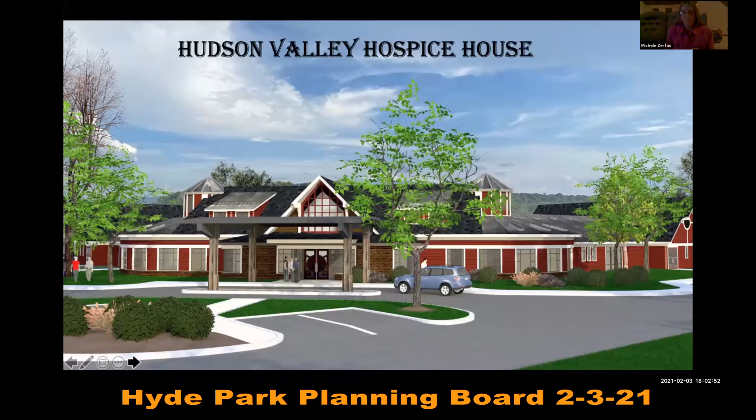Since you last seen the Hudson Valley Hospice House, the overall site plan, which would be slide 2. I don't know if Neil's going to run the. Okay, slide 1 is Hospice House, the front. That's what it looks like, and then the second slide will be the site plan, and the site plan is basically the same, except that we've moved the oxygen.

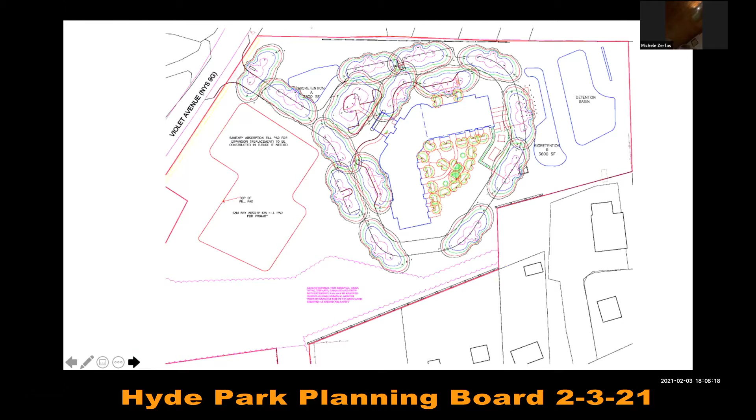And then the area of trees to the south, that area is sparsely treed. If those of you who went on the site walk remember, there are trees out there, but they're spread out with lots of rose cane underneath. So this area is not really going to be put into preservation because it's going to need maintenance. Those rose canes are invasive species.

For the building, there's trees proposed along the road. The one section by the bioretention where no trees are proposed is because the bioretention will be 5 foot high and it's going to provide its own screening.

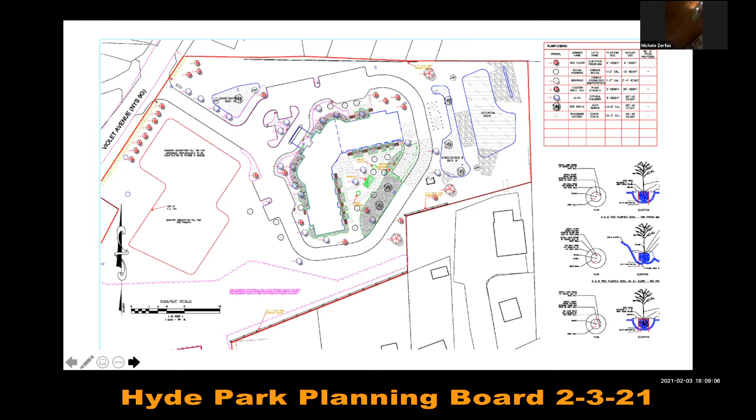So that covers the majority of the items. I would be very interested in hearing the planning board's comments and opinions on this project. So Chairman Dupree, I'll send it back to you. Thank you.

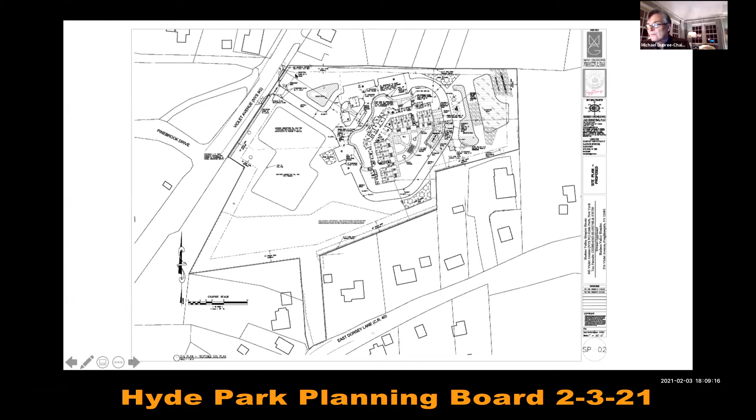Board members, do you want to go first for once instead of having the consultant speak? I don't see Mr. Sotero here. There he is. You see him? I'm here. Well, I hear you. For some reason, you're not showing. Oh, there you are, Peter. Sorry. Yes, I'm telling you, I'm losing this.

So board members, do you want to go first? Let's break with tradition tonight. How about starting with Diane? Ms. DiNapoli. Okay. Good evening, everyone.

I did hear Michelle talking about not having a need for benches, and any landscape at the opening at 9G. There is landscape, we're proposing trees up there. We just didn't know if there'd be a purpose to have benches up there.

I do think benches are important, not only because unless you're only going to hire staff that guarantee driving with cars, you have employees that will be taking buses or public transportation. That would be a courtesy for them to have it. I could also see, if not the residents themselves, family members there who have been there with their loved ones, wanting to go for a walk, and before they turn around and walk back down, wanting to sit, especially if it's nicely landscaped. So I do think a bench or two would be important in the area.

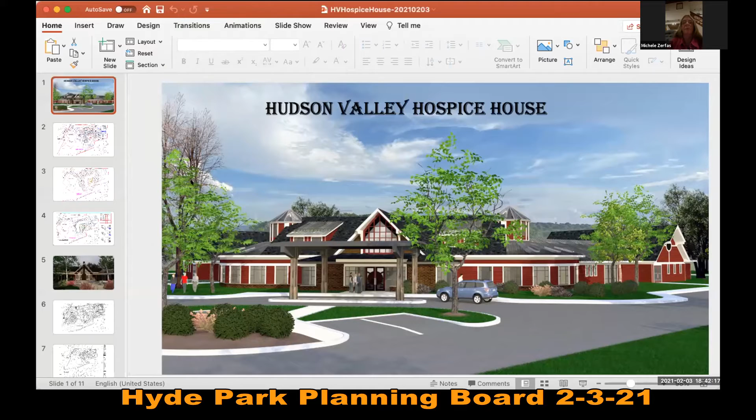Neil, it's the second slide. The dumpsters are in the back, in a shaded area near where the oxygen tank is, just north of the car repair place, kind of the northwest corner of it. There's a little bump out, a small rectangle coming down off the driveway next to the bioretention.

That's where the dumpster is located. I think it'd be helpful if you could use a pointer on the plan just to make sure everyone's clear. Whoever's screen it is, there it is, Neil's got it. Perfect, great circle. Thank you, Neil.

And then the septic system and the well that we're talking about - the well is in the courtyard in the middle, right next to the building, at the back of the building in the courtyard. Yes, right there, that's the well.

And the septic system on the left side, you'll see two rectangles together. The big open area is where the absorption fields will be, up against 9G. Okay, over there, thank you.

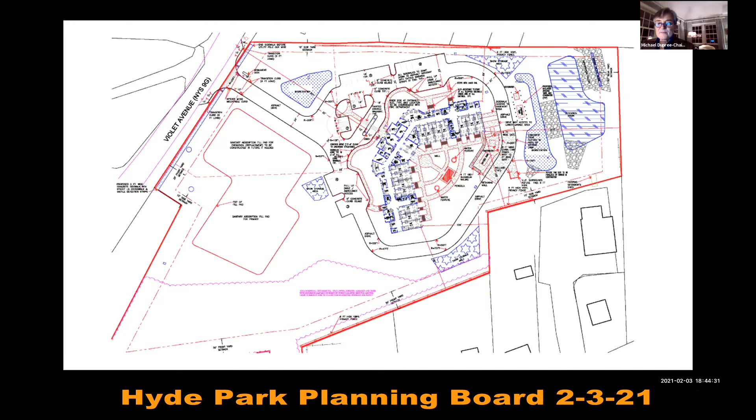Hi, I just want to thank the board for such a wonderful job of taking everything into consideration, all of our concerns. The only thing I have to say is a dark fence with some cedar trees would be lovely.

Thank you, I agree with you. At our agenda meeting, I Googled while we were on Zoom and looked at all the colors for vinyl fences. I just assumed they were white and gray, that's all I've ever seen. They come in every color, including hot pink, of all things. I don't know why you'd want a hot pink fence, I guess maybe Baskin Robbins still has those.

But at any rate, I was going to echo my colleagues that a natural earth tone color such as gray or brown would blend in better than white. And there's no difference in cost whatsoever for the different colors. So thank you.

And Mr. Leonard? Good evening everyone, thank you for taking the time and considering all of us as a neighborhood, we do appreciate that. As far as looking and viewing from the neighborhood, 6 foot wouldn't be high enough because I look into Sue's second story, so 6 feet isn't going to be enough.

You should be able to share. All right, can everybody see? Yeah. So this is the existing site plan, basically as it exists today. This is, on the right, the existing adoption education facility, and then as the chairman described, the existing medical facility is over on the left. I assume everybody's fairly familiar with the site.

The SPCA has a tremendous difficulty having these buildings separated. I think there was an initial site plan which anticipated a phase 2 off on the right-hand side of the existing adoption building. But they received some funding, and they had tremendous financial difficulties, and wanted to do a much more modest proposal to get the medical clinic facility closer to the building. There's some real issues with topography on the other side for a small project.

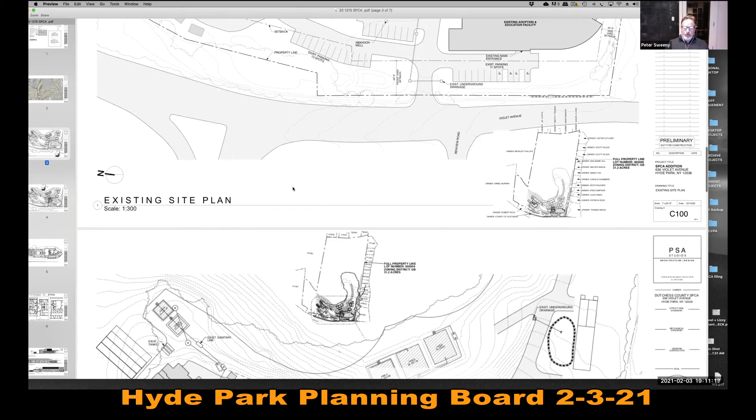So the proposed plan basically looks to take just the clinic part of the existing building, which is actually rather small, basically 1,700 square feet, and add it to the existing building. Since there is no change of use, there's not going to be any additional staff or visitors as a consequence. There's no change to the amount of parking that's required for the project.

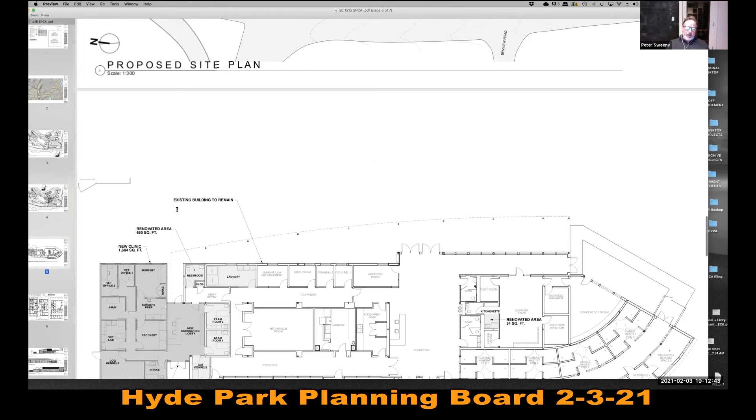Basically, we've left all of the existing parking in place. Just to point that out, this is existing, 19 spots. What we've done is basically just shift the gravel access drive, which goes down to the back of the site, slightly to the left. The building we're proposing houses all of the clinic facilities. There's some minor changes in the existing building which I don't believe we need to review. The big issue for the facility now is they need two different entrances and accesses to two separate buildings, so this allows them to unify that and create one new public access. It's easier to control, and it's certainly easier for drop off for the public right at that point.

And then the proposed addition, we're basically trying to... this is the existing addition right here. You can see the entrance, which is tucked back from the front facade of the building. But the proposed addition, scale and material-wise, ties into the existing project. The intention is basically to propose as minimal intervention as possible.

The one other small change we're proposing is to put a new generator at the rear of the building. It's basically attached to where the existing dumpsters are, and that would be screened by the building from the front. We're proposing screening around the dumpsters, which does not have screening at this point.

And I think those are the highlights. Happy to answer any questions the board may have.

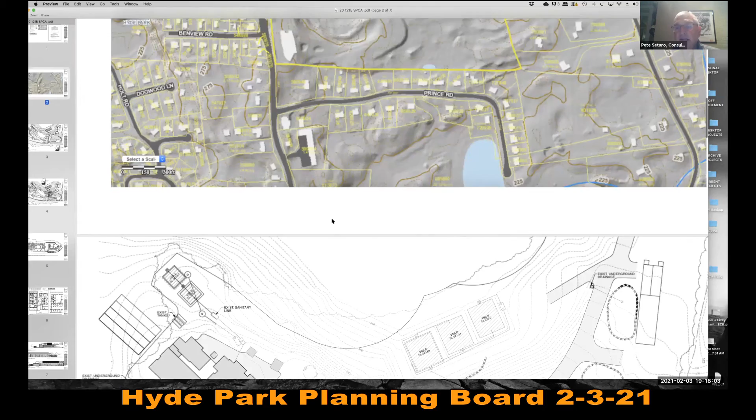Sure. As far as the DOH, if we're going to do a Type 2 action, in my opinion—I mean, we do need to do the 239-M for county planning—but the health department's going to have to issue an approval anyways on the project because the project is proposing a new septic tank to connect to their existing leach field. It's fairly minor, but it does require approval of the health department. So the health department's going to get this anyways. I don't know that we need to make a special referral to them, but they will require an approval, so I think a courtesy referral is in order.

That's fine. Sure, you can do that. Absolutely, yeah, go ahead and get the process started. Bonnie, before I leave you—sure.

In your memo, let's see, I'm trying to find it. Parking calculation necessary, just some small stuff. But we need to show the kennels. There's a kennel run that's not shown here, Mr. Sweeney. I'm not sure that it's still there.

Are you talking about in this area here? Yes. Okay, if it's there, I'll show it. Is it intended that they will be demolished? That's outside of what my conversation has been with them, but I'll clarify that and add it to the site plan.

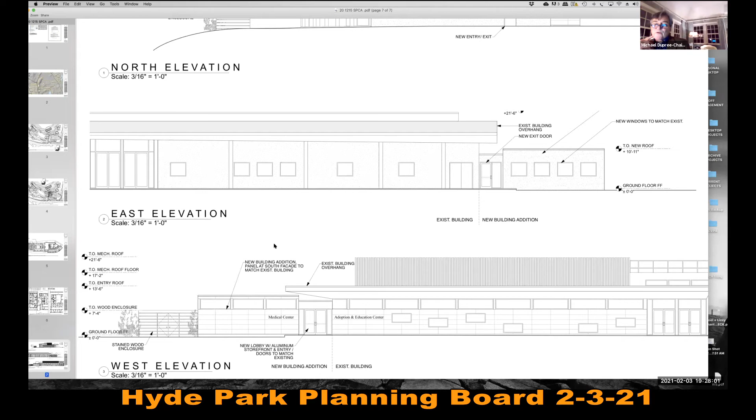The reason this was addressed was because of the master plan they'd already told us what they plan to do, which included equine facilities, etc. And as you said, phase 2 is supposed to be behind where the offices are right now, or to the east of that. I know there are topographical issues there, so it's not a big deal, it's just something we should probably know or not know.

All right, I will see if there's also access issues. I'll clarify that, and I'll have to let you know.

Thank you, and lastly, I'd say that you do show some potential plantings, so if you could be a little more detailed as to the species, quantity, and planting size. And then if you are proposing any kind of lighting on the facade or building, just provide some kind of spec, or if it's the same as what already exists, maybe add some notations.

Okay, yeah, I think we called that out somewhere. I'll try to make sure it's clear, but there's existing lighting under the canopy which lights the walkway up to the entrance. So on the front there was no new lighting proposed, but by code that side door will need a light. All right, we'll include that.

Thank you. Yep, Setaro? Sure, hi Peter, how are you? Been a while. Yes and no. Peter and I do quite a bit of work together at Bard College, so he's a good man. Likewise.

Yeah, so we don't have a lot of comments, there's not a lot of engineering things here.

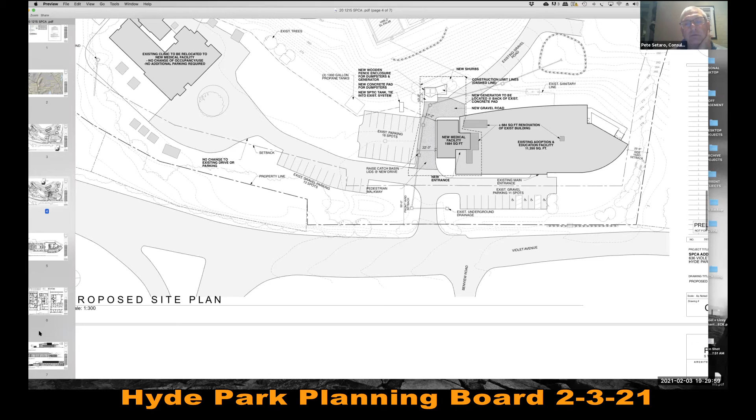I mentioned earlier the septic tank will require approval of the county health department. But Peter, you said that because the medical facility is being moved, they thought to tie into the existing septic system for that building, so there wouldn't be any increase in use. Isn't there a separate septic system for the newer building? Yes. And there's like no good way to get to it.

Well, this was a call from, actually it's Doug Strawinski helping them with the construction. Oh, okay, it's like old home week. I know, right? But I think the thought was that would actually be easier. Yeah, that was his thought.

Peter, can you explain what's going to happen with the old building? Because if you're transferring the parking to the new building and transferring the septic to the new building, is it going to create a large structure that's not able to be used?

They do not have plans. We talked to Michael and Tad early on. Any proposed future use will have to be brought to the board. But for now, the only thing there is possibly kennels, if they run out of kennel space in the existing facility. So all the offices, all of the occupied space, is being moved to the medical facility.

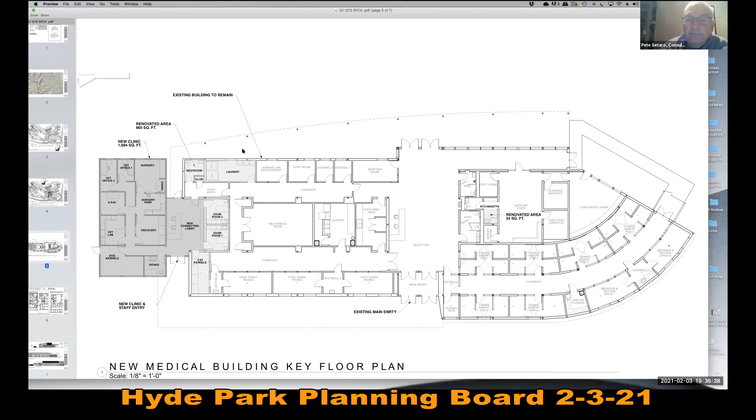I don't believe the board will have an objection to that. That'd be great, Pete. So when you're ready, you contact me and we can get on the phone with Doug. We'll figure out something. I appreciate that a lot. No problem. Ross, comments?

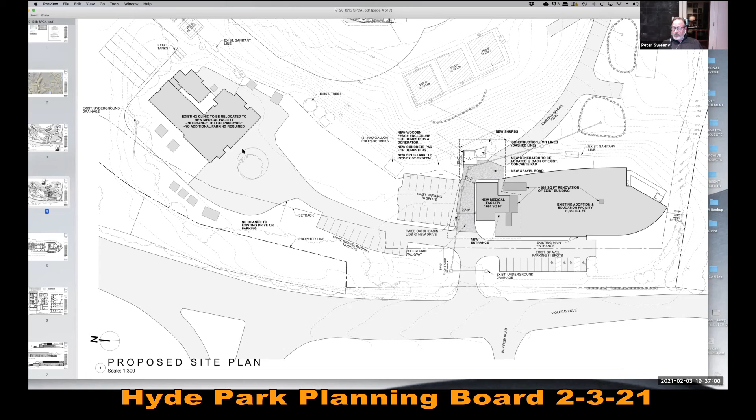I just want to make sure about the mechanicals for this building. Are you modifying the existing mechanicals to handle the additional square footage? No, there'll be mechanicals wall mounted on the back of the building. I will check and review with Doug, and if there's anything on the roof, we'll notate those and provide screening. It may turn out that if we have to do something with the roof, we'll incorporate that.

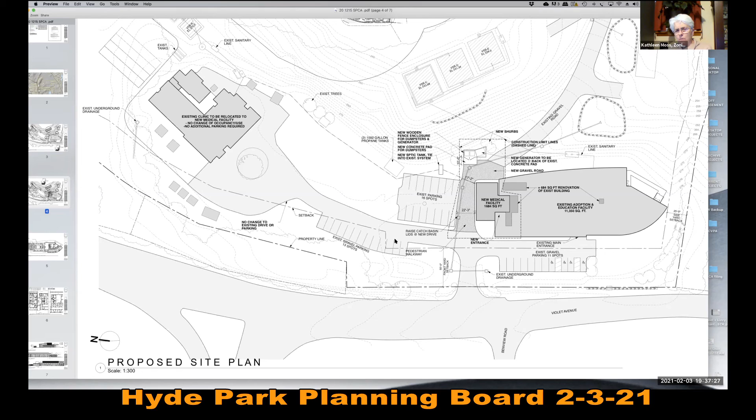Anything else, Tad? I'm trying to remember whether that well was officially abandoned and sealed according to Department of Health standards, or is it DEC standards? Health department standards, at the end of construction of the new building. I'm trying to remember - or did they keep it as non-potable maybe? I can't answer that. I know this was noted on the original site plan, so it's sort of carried over. Well, it's in the middle of the parking area, so maybe it was officially sealed.

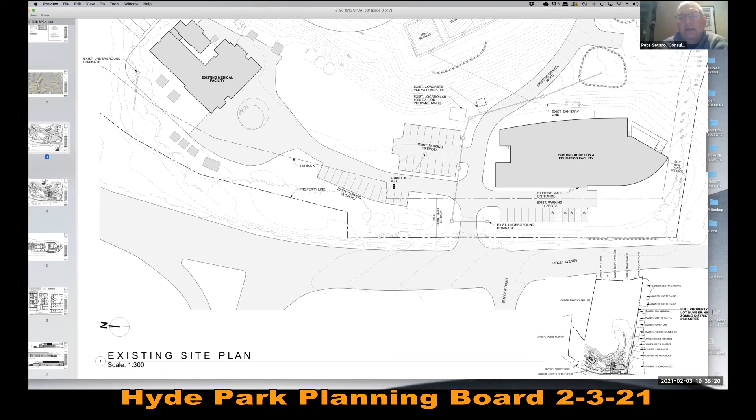Okay, we can check that out. We're going to be dealing with the county health department anyway, so they should have a record of the well abandonment, because you have to have an engineer send in a certification letter that it was done.

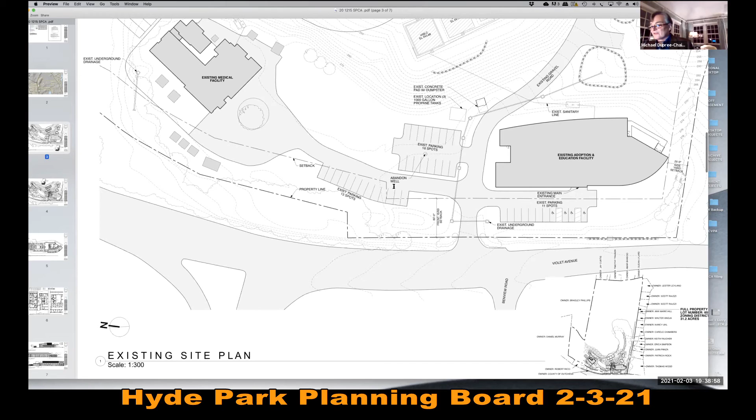Victoria, before we leave the consultants, can you weigh in on your thoughts about the flat roof - the prohibition on flat roofs? So it's a tough one, and I'm not sure I want to weigh in right this moment. I think I want to talk to Tad, because it's going to set the precedent for review of future applications. You guys confer, and if you want me there too, I'll be happy to, or any other planning board members, because yes, this is going to set a precedent for other applications.

Okay, let's start with, yes. Michael, I would just like to check notes, because when the zoning was being put in place, I know the planning board had comments. So let me look at my notes to determine what the intent was, as far as whether there was an expectation that it could be waived or not. Good idea. And just for everyone's reference, Ms. Franson did write the zoning, so she has copious notes on it and can go back and check. Thank you. Let's go with board members.

Ms. Wieser, first. I hope there can be some resolution to the flat roof issue that doesn't set a negative precedent, that helps the SPCA, because I know this is really being done on a tight budget. And I like the design, I like the elevations. I think Peter did a great job fitting in this piece. So I hope there can be a resolution to that.

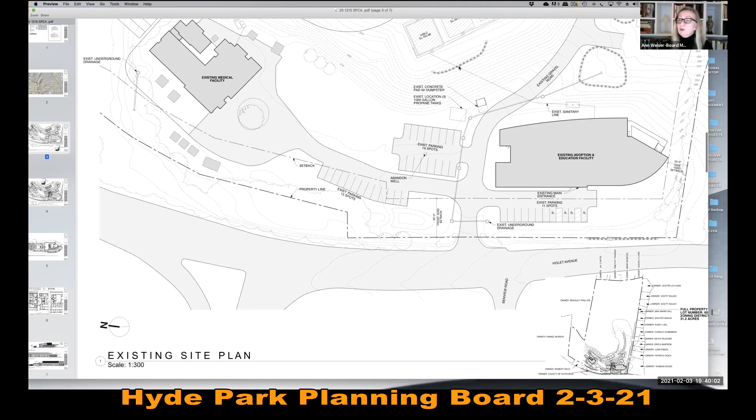Can you unshare the screen, please? Oh, yeah, sure. I didn't hear, somebody spoke and I didn't hear what it was. Somebody asked me to unshare the screen. Okay.

So that's my general comment - I do think the gravel drive's got some funky angles in it, and I'll leave that to the fire department.

There's like three or four different angles in that new little stretch of gravel drive, so I don't know aesthetically how that will look. It'll probably be okay, but I'm curious to see if the fire department will be fine with those angles on making the turn.

I saw a little typo on your environmental assessment form where it said 168 square foot addition, and I know it was supposed to be 4 digits. Yes, 1684, so you just need to have that aligned.

So I think those are my comments. I really like it and I support it, and I hope we can make this as painless as possible. I also want to take this time to thank Bonnie. I really, really liked the layout and the approach to your comments. I found the summary table helpful, and I love that it was page by page, which is how I look at drawings. So I really liked looking at your comments page by page, and I just wanted to thank you for that.